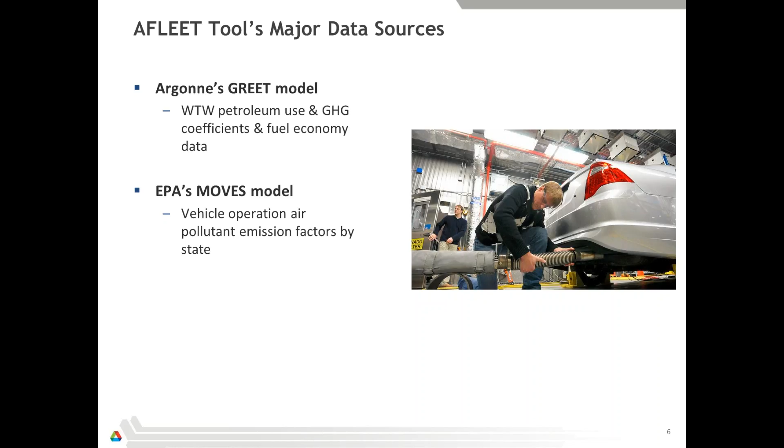Using the GREET model, we have petroleum use and greenhouse gas emissions, as well as fuel economy data. We also use the U.S. Environmental Protection Agency's MOVES model, a vehicle simulation tool that provides air pollutant emissions. This is US-based, so we have state-based emission factors for gasoline and diesel primarily, which is what that model covers. We use some of our research comparing that to alternative fuels. Obviously for electric vehicles there are really no vehicle operation emissions except for some tire and brake wear.

And then we also use the Clean Cities Alternative Fuel Price Report. Clean Cities is a Department of Energy program, and through that effort they look at fuel pricing on a state-by-state basis. You can see in this chart that fuel prices are going to be different depending where you are. So we capture that and provide, at least by default, whatever your typical state-based price will be, but since the tool is a spreadsheet, it allows you to overwrite and put in your own data as well.

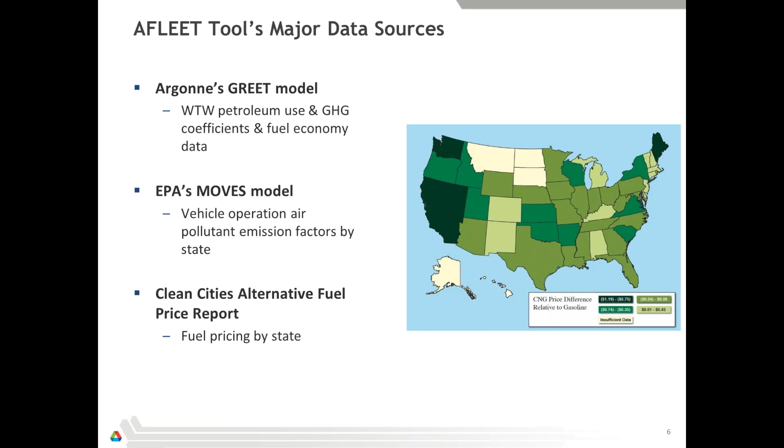So what does the AFLEET tool do, or how does it calculate things? Well, it really depends on what your goals are. It has really three calculation methods.

The first is a simple payback calculator, and this is really looking at comparing the purchase of a new alternative fuel vehicle versus its conventional counterpart. Conventional is gasoline for light duty and diesel for heavy duty. So what we're trying to do is look at some of the incremental costs of the new AFV. Let's say for an electric vehicle, those vehicles cost more than their gasoline counterpart, and there might also be some infrastructure cost like an EVSE. That's an incremental cost you have to outlay at the initial purchase. But these vehicles have much lower operating costs, so over a certain amount of miles driven or years of operation, you're able to pay off that incremental initial cost. That's a good starting point to give you a sense of whether this vehicle makes sense for you, and how long it's going to take to break even.

The next is a total cost of ownership calculator, and this takes the economics of this new vehicle purchase to a more detailed level. We're looking at net present value of the cost of the vehicle over the years of planned ownership, getting into more detail to really understand the economics. So depending on your needs, you might say, I just want something quick and dirty, I'll use the simple payback calculator. Or for total cost of ownership, I want to tweak more of the details and see what the lifetime ownership cost might be.

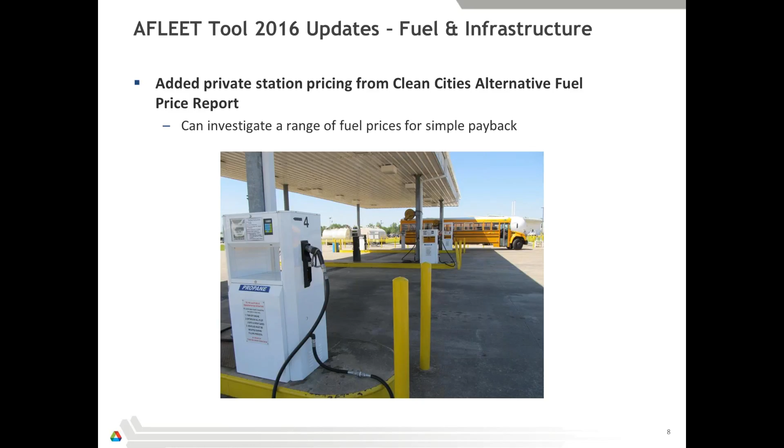You can also look at ranging fuel prices or electricity prices as well. Another thing is that we added refueling station and EVSE infrastructure construction costs, operation costs, and maintenance costs.

For EVSEs, it really depends on the equipment you're putting there, and so it can go from something a consumer has at the base level that would go in a garage to something for workplace charging or public charging, all the way to DC fast charge. We have some default information on all those types of equipment.

As a spreadsheet, you're able to enter your own information, and we highly recommend putting your own information in, because that makes the analysis more realistic to your specific case. But we do provide a lot of this default vehicle cost and infrastructure cost data, so you can at least get a starting point.

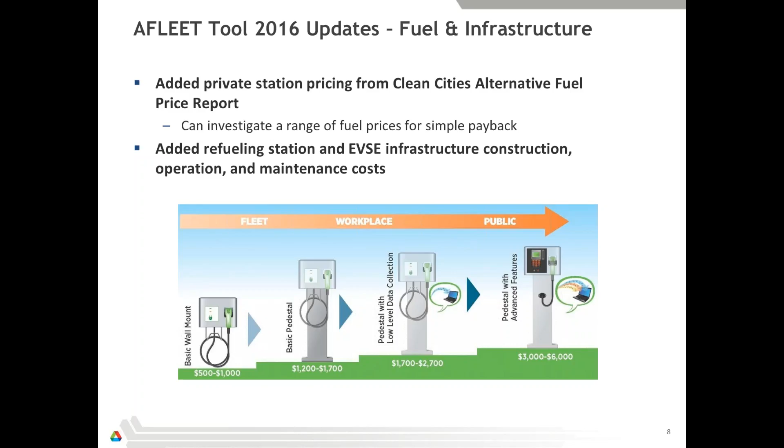The next big update is that we are using the GREET model, so we continually use the latest data from our life cycle analysis. I was involved in a report looking at heavy-duty fuel economy and emissions data last year, and that was a major addition to the latest GREET model, which had always been a light-duty focused model, so we added heavy-duty. That data was incorporated into AFLEET.

We also included fuel cell vehicles. Obviously, fuel cell vehicles are becoming available, with California and the West Coast being the prime example of where they're being leased and stations are being developed. We also included updates on some of the other alternative fuels and pathways for hydrogen. And the EPA updates their model as well, so we're including the latest air pollutant emission factors from that model.

One of the other additions we include is externality cost. Some of the stakeholders from Clean Cities were interested in trying to evaluate the different costs, or how you say what is more important - petroleum use, GHGs, certain air pollutant emissions, whether it's carbon monoxide, NOx, or PM. So we looked at the latest literature on what the economic damages are from greenhouse gas emissions or air pollutant emissions, or what are some of the impacts of using petroleum use that aren't necessarily captured in the market price included in your gasoline price.

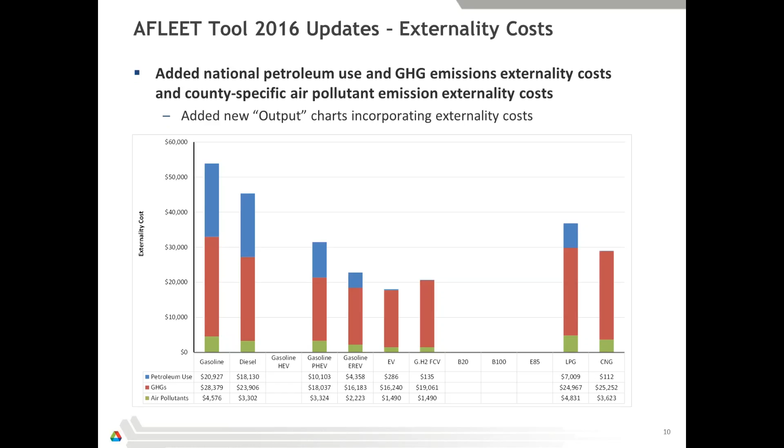Now that I've run through some of the tool and its new features, I want to go through what kind of information you would typically need to do an analysis with AFLEET. So the first step that fleet managers or people working with fleet managers often take is really just auditing or getting a sense of your existing fleet. We're doing this from an energy and emissions footprint approach, looking at the environmental impact of your different vehicles.

So really the first step is looking at your location. You enter your state, and you can enter your county if you want to look at these externality factors. After that, you can enter some fuel production assumptions depending on which vehicles you have.

In the case that you have electric vehicles, if you can see near the bottom - I'm not sure if you can see my mouse - you can enter the grid mix for the plug-ins, the EVs, and if you're using fuel cell vehicles with electrolysis, you can enter that as well. Basically, we have some of the NERC regions, which are U.S. regions for the large-scale grid, but then you could enter something more local, user-defined information as well.

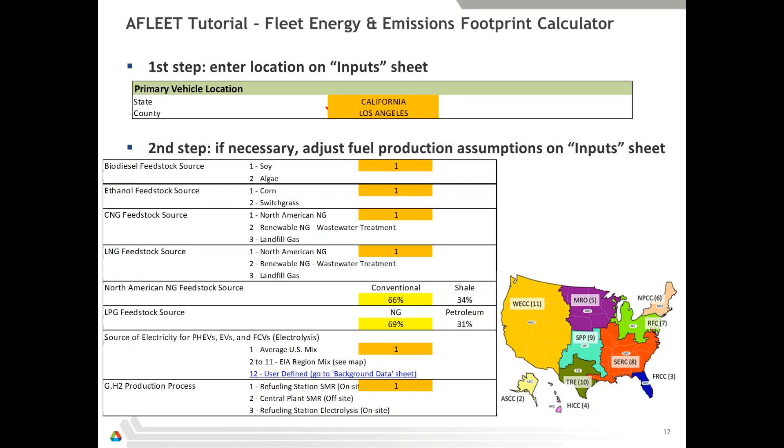So that allows you to put that in there. The next step is copying and pasting data into the spreadsheet. The information you need is your model year, your annual mileage, and your fuel use. Then after that, you use a drop-down menu to pick which kind of vehicle you have.

In this case, looking at about 25 different passenger cars, they're all running on gasoline, ranging from 2005 to 2007. After you paste in that information, you can scroll to the right and get the specific environmental factors for each individual vehicle.

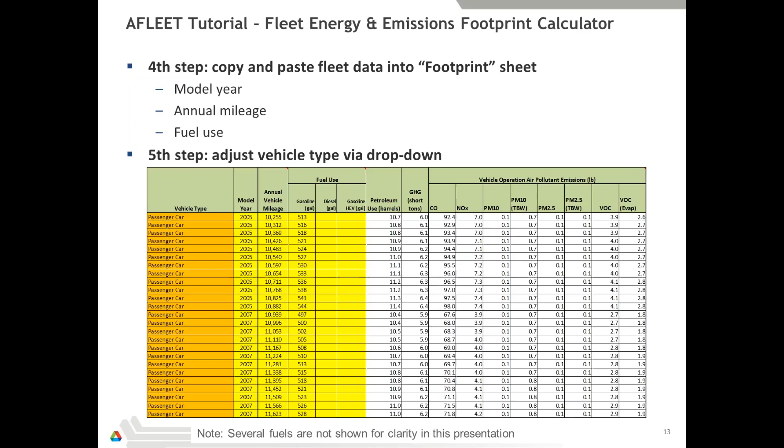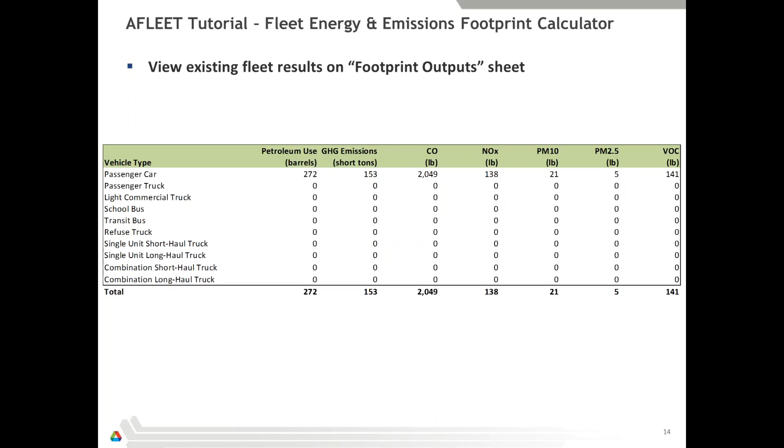Then on the next page, you'll be able to look at charts that summarize on a vehicle type basis where the emissions are. In this example, we chose only passenger cars, and it gives you the breakdown of the total footprint of your vehicles.

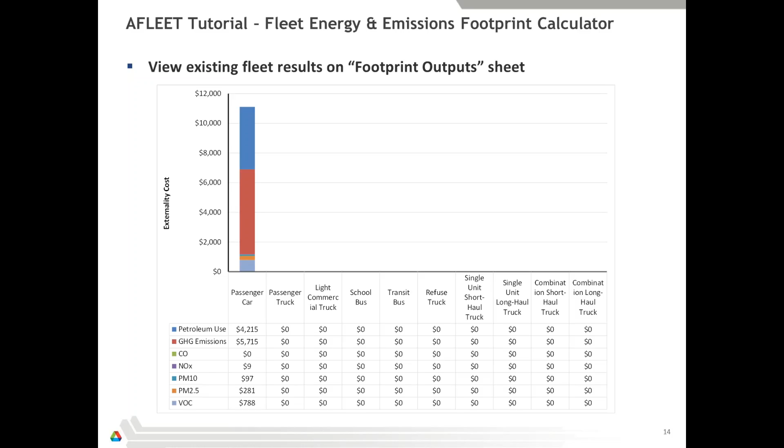So that's really it for doing a footprint. It's really just copying and pasting some of the data that you should already have. It's pretty straightforward. So the next step is: okay, I have a sense of what vehicles are in my fleet, what the environmental factors are.

What if I replace these vehicles? What if I buy something new? You can use the simple payback and the total cost of ownership calculators to really look at that.

In the spreadsheet, if you already used it for the previous step, you already have state and county entered, and then the next step is to enter the vehicle types. Here we're again looking at passenger cars, and then you enter key info like the number of vehicles you're interested in comparing, the annual mileage, the fuel economy, and purchase price. By default, we have annual vehicle mileage, fuel economy, and purchase price already there.

As I mentioned previously, you can overwrite this to better estimate what it is for your specific application. Obviously, mileage will depend on the fleet, fuel economy will depend on the vehicle you're interested in, as well as purchase price. But those are some of the key things you first need to enter.

If you're looking at heavy duties, it would be the same type of application. We do have heavy duty electric vehicles, as well as fuel cell and some hybrids as well.

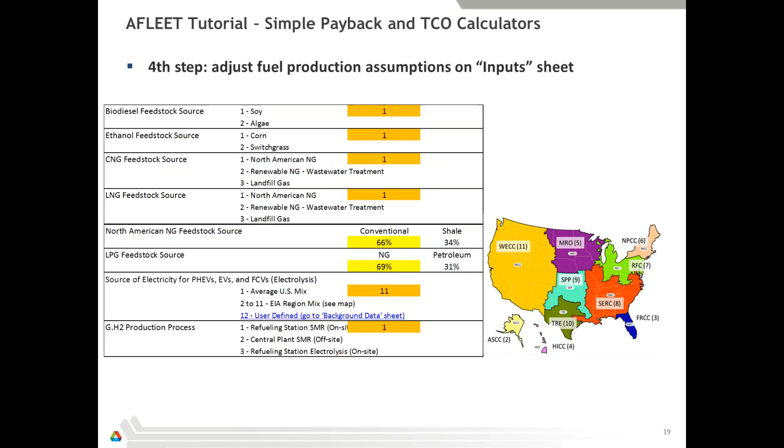If you're looking at plug-ins or extended range vehicles, there's a couple of other inputs that are helpful to enter. The information on the first sheet on fuel economy was basically all charge sustaining, or your hybrid mode. So we also have your EV mode fuel consumption, how much electricity you're using per mile. You can enter that there.

Again, we have defaults. One's based on a plug-in... I guess now somewhat gone, the plug-in Prius that was previously there for the PHEV. Actually, I think that's the Ford C-Max Energi. And then the EREV is based on the numbers for the Volt.

You can enter that data there, or adjust how many times you charge per day and how many days you drive per week, and that will adjust how many miles you actually drive in EV mode versus gasoline mode. There are other assumptions too, like maintenance and repair costs, and you can enter some of that as well.

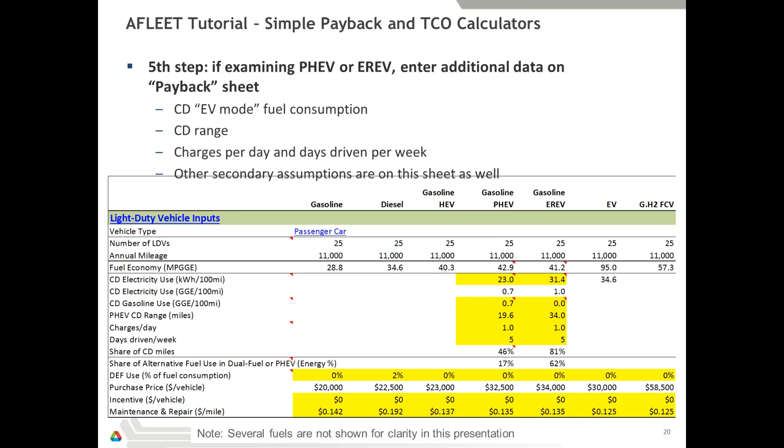For the fuel price sensitivity, we have some ranges already built in, but you can adjust both a low and high case for conventional fuels or alternative fuels as well. You don't have to re-enter it if you're looking at gasoline and also gasoline hybrids and plug-ins. Once you choose it for gasoline, it'll apply to basically all the other vehicles that use that fuel.

Finally, for the input side, if you're looking at infrastructure cost, you can enter that here. In this case we're going to look at EVSEs, doing dual pedestals. For the 25 vehicles we're doing, we'll have maybe one extra here, and do 13 EVSEs level 2. We provide data on both the initial purchase price and operation and maintenance costs, and you can adjust that if you have better data.

After that, you're basically ready to look at the results. One thing to mention: here are the economic paybacks. In our default cost information, we don't include incentives or tax breaks. Oftentimes there are regional, local, or federal incentives for electric vehicles in the U.S., and I believe some provinces like BC have their own incentives. You would need that secondary page, where you can either enter the incentive or just adjust your vehicle price.

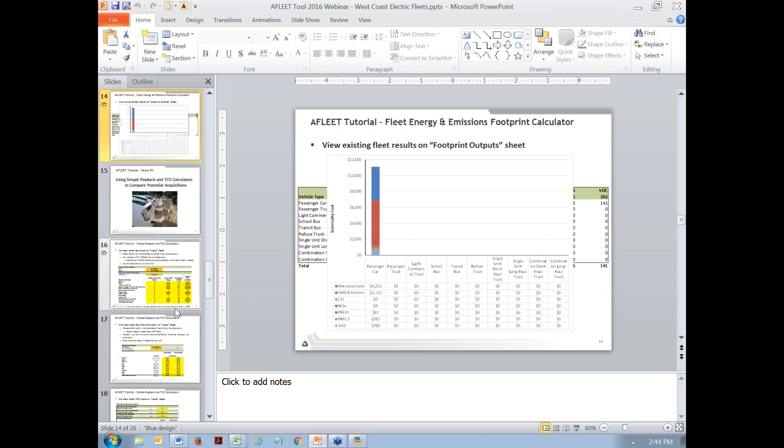A follow-up question: after installing over 1,000 charge points over the last 4 years to support our fleet and employees, our average price per plug is $13,000. What drives this price up? Our on-site costs, I have historically found. Do you have any comments for that?

Absolutely. I think that's one of the difficult pieces of cost in general. There's lots of different issues with cost, but one thing that changes over time is especially fuel and even vehicle price costs. On the infrastructure side, it's really heavily dependent on specific specifications of whatever you're installing, and that can impact based on the location you're in, the state, and labor costs in your area. It can really come down to the specifications of whatever you're installing. For EVs, here at Argonne, we've been deploying lots of EVSEs and doing different testing, and it depends if you're going to have to break a lot of concrete to run electricity to a parking lot, depending on how far that distance is. So it really does depend.

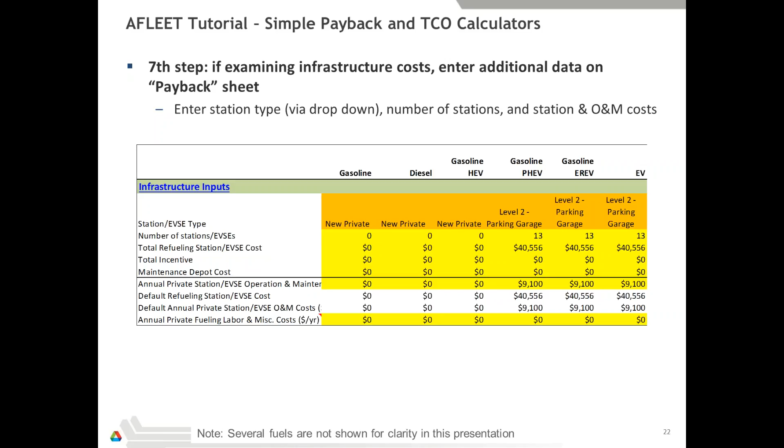No, I don't think that's specifically the case. One of the issues is how this tool handles it. I was running an example with some fleet data, saying on average these 25 vehicles drive 11,000 miles per year, using the costs that are already defaulted. I didn't change anything to run something.

But let's look at the price spread. We're seeing roughly about $10,000 for the EV case, which I think is basically along the lines of a Leaf-ish type price. So that $10,000 is an added cost.

And then all the EVSEs that we have included here, that's an added cost. In this specific case where fuel prices - we're talking gasoline - the private station price being used is $2.84. Electricity price is definitely on the high side, being California, at 16 cents per kilowatt hour.

It really depends on your assumptions, and I think the interesting part is to get a sense of does it make sense in my application. If you only drive 5,000 miles or so, you don't use the vehicle that much, so purchasing a very expensive piece of equipment, you really need huge amounts of savings on the fuel use side to make up for it.

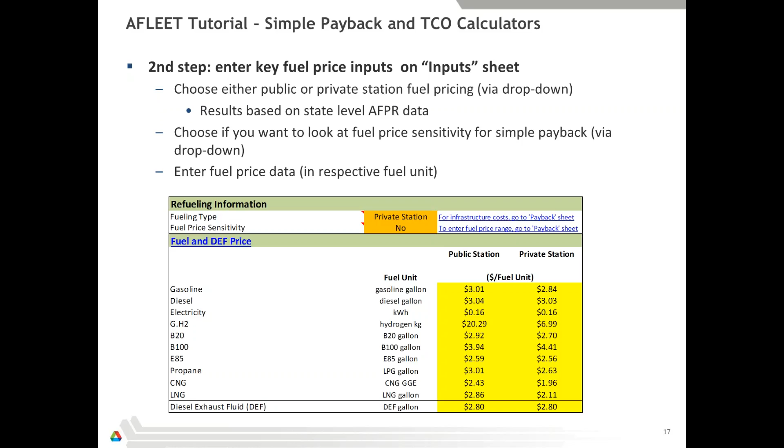And one last question now: how important is driver behavior for reducing emissions? So, it depends on the vehicle type.

Absolutely, I think for electric vehicles we've done some studies on the fuel economy for different vehicles depending on duty cycle. You'll see in cases, specifically for gasoline, if you're driving on the highway at relatively steady speeds, you get a boost of fuel economy - highway mileage is better for a gasoline vehicle.

For the EV, the difference between how you drive it, whether city or highway, typically isn't as big of a change, depending on the specific vehicle.

But I think on a gasoline vehicle, for air pollution, hard accelerations really are a huge part of where some of the particulate matter emissions come from. So that's kind of a complicated thing - it depends on different factors, what you're specifically looking at.

But in general, driving at steadier speeds, less stop-and-go type driving. For EVs, even your use of a heater is going to impact your electricity consumption. So it can depend on the vehicle, but yeah, that's a good question.